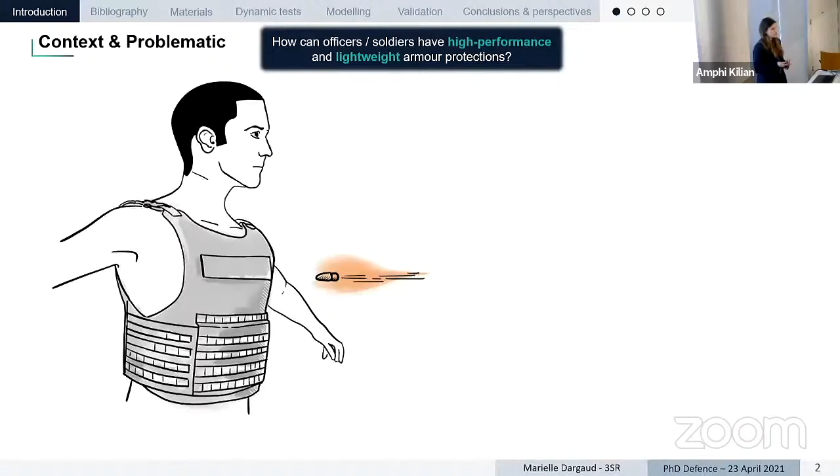So first, what is the context? This is a current challenge: we want to improve armor protections for soldiers and officers. To do that, we need high performance armor protection which is also lightweight. To achieve this, we use, for example, a bulletproof vest with a hard plate that absorbs the energy of the bullet.

These plates can be made of metal, but with this type of solution we reach relatively high levels of weight. For example, a complete protection would be more than about 4 kilograms. This is why we are working on other solutions made of ceramic materials to decrease this weight. The ceramic is always used in combination with a backing, but with this type of solution the complete weight is lower than 2 kilograms, at least twice lower than for metallic protection.

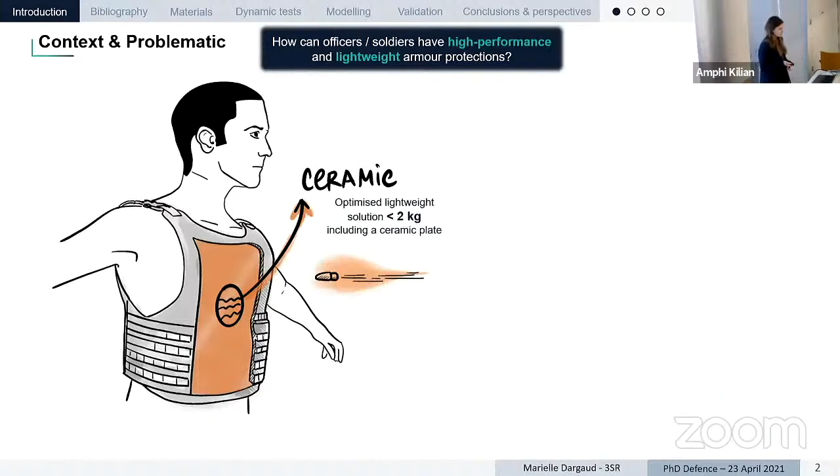Now, you would think of ceramic as something very fragile and brittle. So how can this type of material be very resistant against a bullet? Well, we do have solutions to make this material very efficient in this type of application, because the ceramic plate is very hard and presents good dynamic performance.

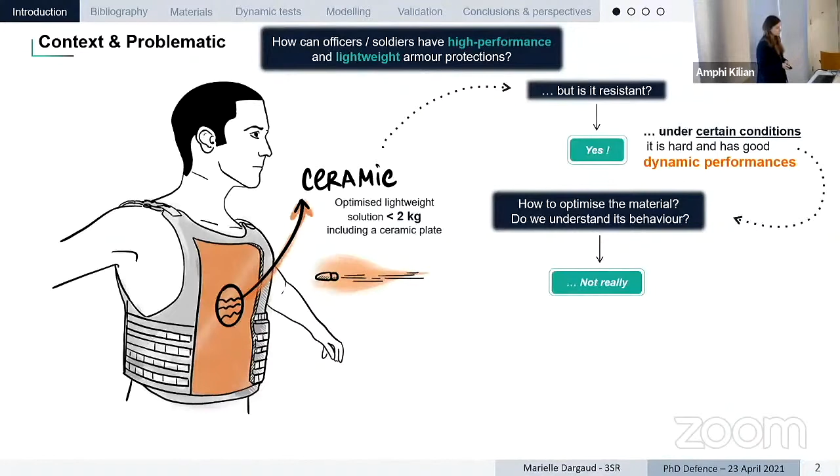Now, if we want to decrease this weight, we need to improve the material according to its application. To do this, we need to understand the failure behavior of this type of material. However, so far this is a big question—we don't really understand the behavior of this type of brittle material.

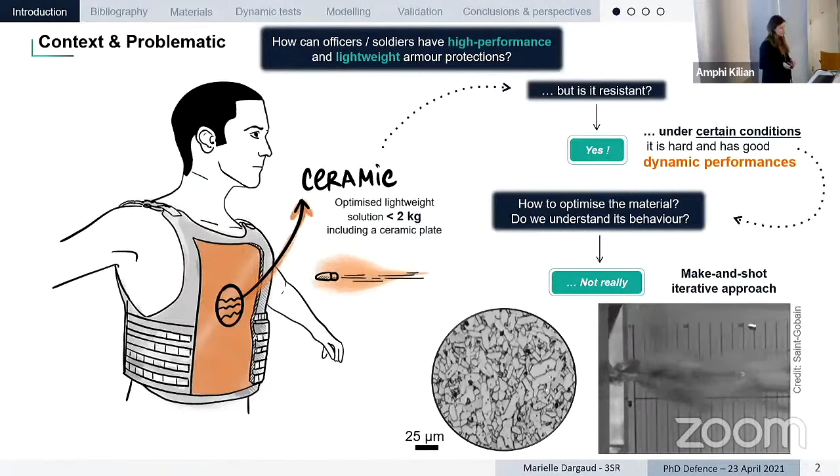For this reason, the main way to optimize this type of material is what we could call a make-and-shoot approach, where we create, with different recipes, a large variety of materials, and then we impact them to see how to improve performance. Here you have a ballistic impact on a ceramic, and you can see the high fragmentation of this ceramic.

So here we need to first develop tools to characterize the material, then modeling to model the failure behavior, in order to ultimately be able to design this type of material.

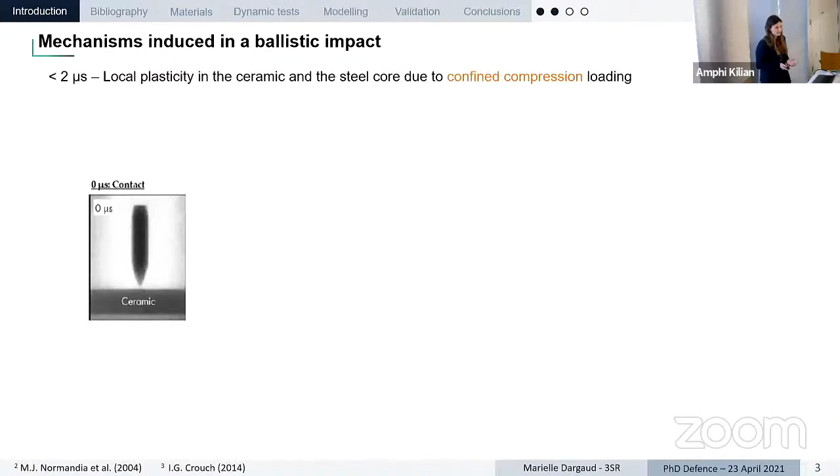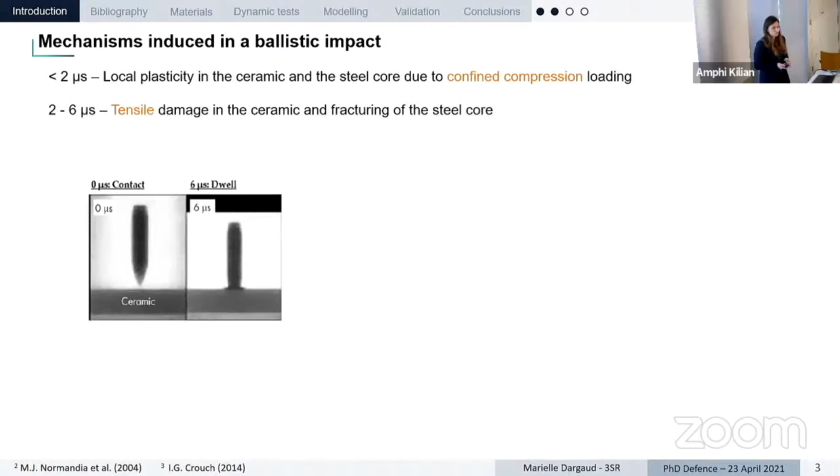During a ballistic impact we have three main stages. The very first stage, up to about 2 microseconds, is when the projectile starts touching the ceramic, creating a very local, highly confined compression which induces local plasticity in the ceramic. Then we have a dwell of the projectile on the surface of the ceramic, during which the ceramic undergoes very intense tensile fragmentation, as does the projectile.

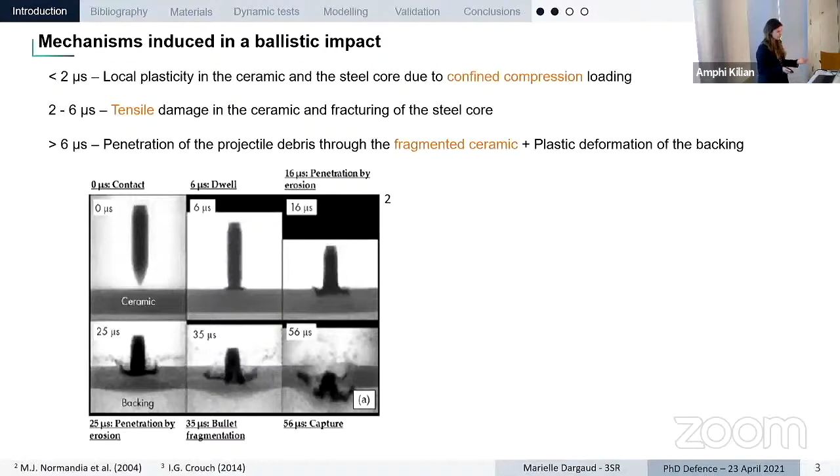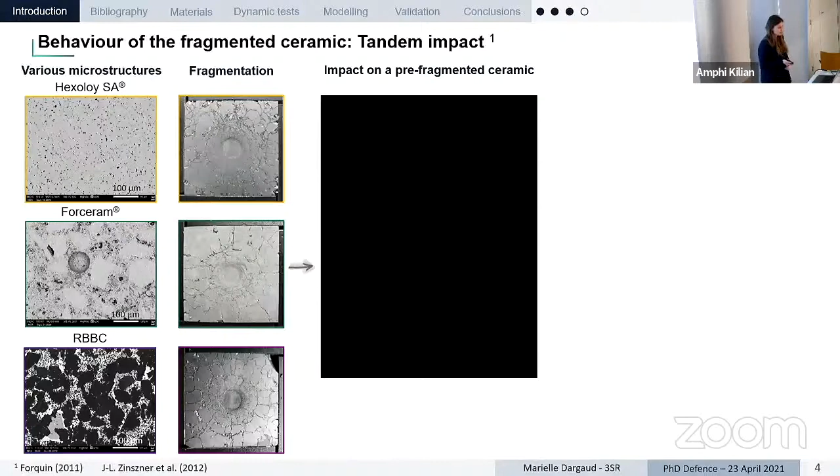Where we generate intense fragmentation in the material, we can see a link between the type of material, its microstructure, and the resulting level of fragmentation. Then we can perform a further impact on this pre-fragmented ceramic with a perforating projectile to evaluate the residual strength of the pre-fragmented medium.

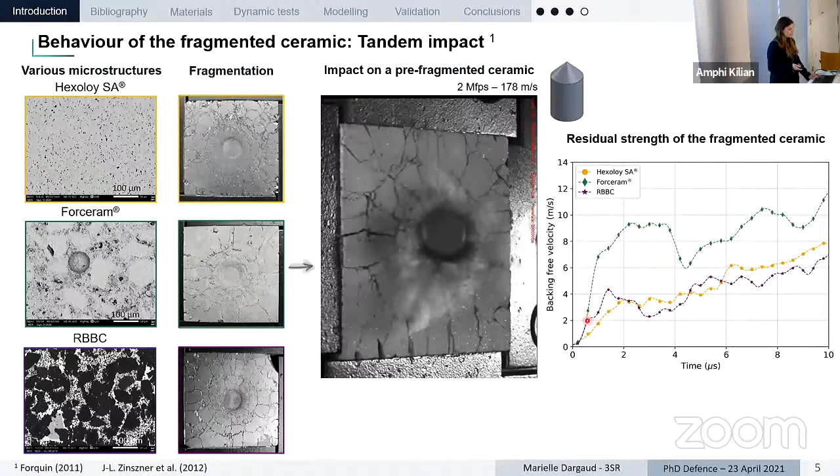By recording the velocity of the backing at the rear face of this system, we can evaluate the residual strength of the pre-fragmented media. Here, for example, you can see very big jumps for the Forceram material, which actually reflects greater resistance to projectile penetration. So we have a link between the microstructural properties, the fragmentation intensity, and the resistance to projectile penetration.

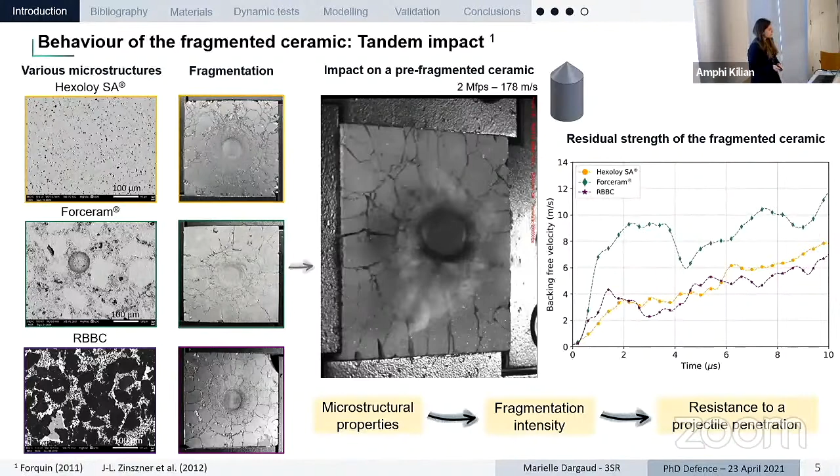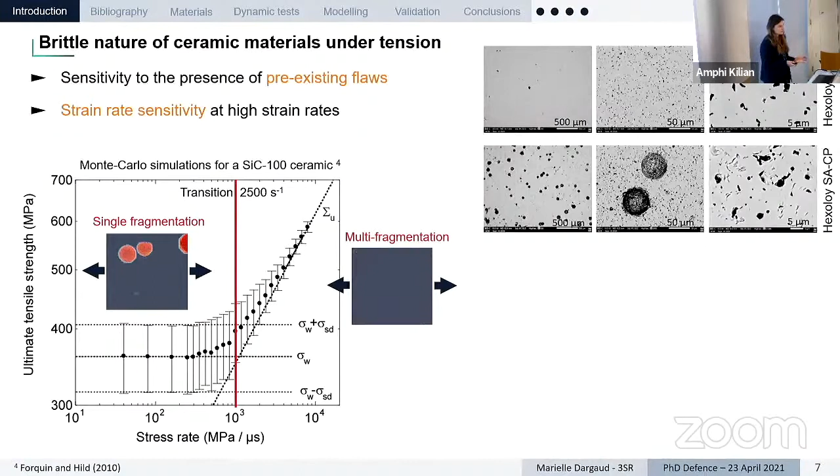And this type of material, because they are brittle, presents a high strain rate sensitivity in their behavior. Here you have Monte Carlo simulations which showed that the expected strength of a ceramic material, silicon carbide, is expected to change according to the stress rate level. At high stress rates, we actually reach an improvement, an increase of this strength. This is due to the fact that according to the loading rate, we induce either a single fragmentation on few defects, or a very intense multiple fragmentation after a certain threshold.

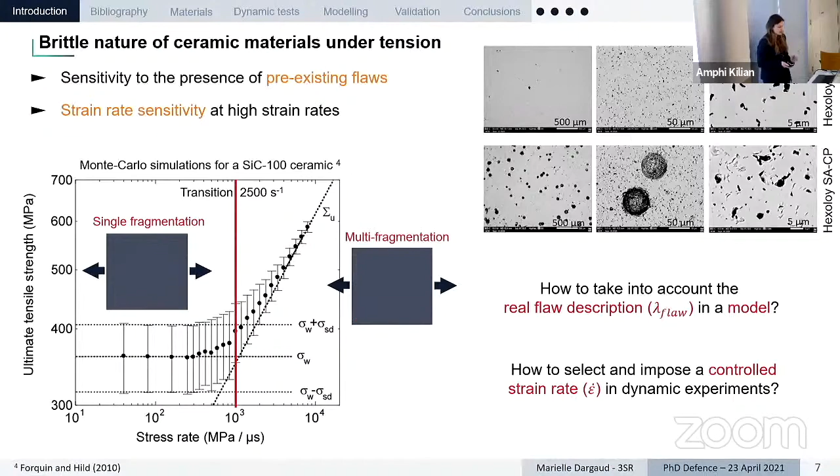So there are two main questions that I'm going to address in this work. The first one is how to take into account the real flaw population in a model, and then how can we select and impose a controlled strain rate in dynamic experiments?

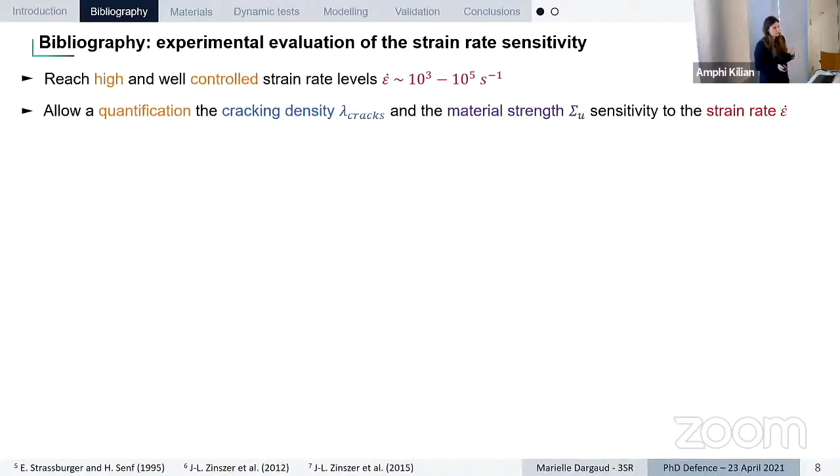When we look at the literature, we have some experimental setups to characterize the tensile behavior of the ceramic, because here we are going to focus only on the tensile behavior, which causes the fragmentation of the ceramic. So the goal is, with this experimental setup, to reach high strain rate with a controlled strain rate, and to be able to reach some quantifications such as the cracking density and the material strength.

The first type of experiments are Brazilian tests or Hopkinson pressure bars, but they are very limited in terms of the level of strain rates that we can reach.

To reach a higher level of strain rate, we can use the plate impact configuration, which allows us to reach very high strain rates. And with a spalling configuration, we can generate a tensile loading. However, in this configuration, we don't manage to reach a controlled strain rate in the material in the failure area.

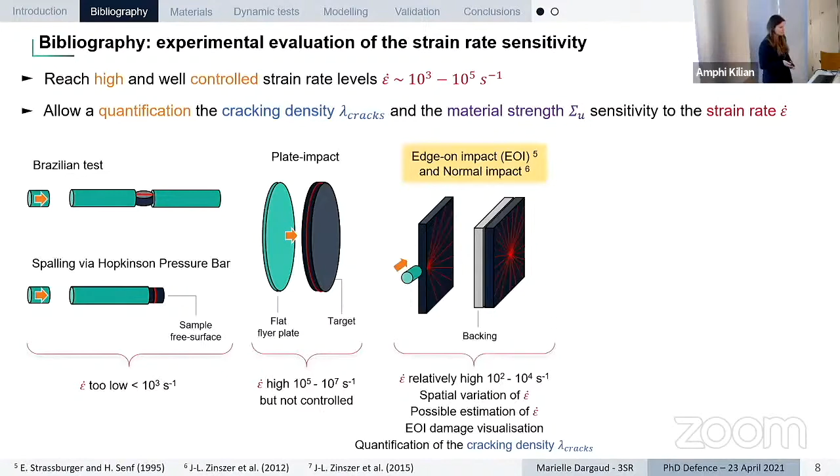The next type of tests are fragmentation tests, which can be edge-on impact tests and normal impact tests. These are two configurations that exist in the literature and provide a relatively high strain rate, which can be estimated. If we look at the type of fragmentation we would get from these two tests, we have the development of radial cracks from the impact point. This configuration allows us to estimate the cracking density in the material.

Then, in order to also quantify the strength of the material, there is the GEPI technique, which can induce a spall failure in the ceramic at a controlled loading rate in the failure area. This technique is very specific: we induce an impulse current in electrodes, which generates a magnetic force causing the failure in the material. However, this technique presents some main limitations.

It's difficult to set up, it's very expensive. So for this reason, we are going in this PhD to develop a new technique in order to reach a well-controlled strain rate that is homogeneous in the failure area. So these in yellow are the two configurations, the types of configurations that I'm going to present today.

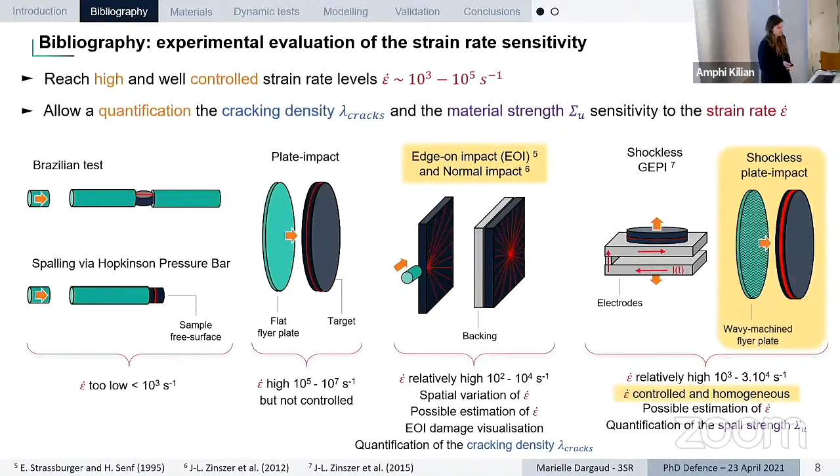When we look at the modeling part now in the literature, well, we have several models, but in our case, for brittle materials, we want to take into account the material microstructure and its sensitivity to the loading rates.

So the most commonly used model to model a ballistic impact is the Johnson-Holmquist model, which is a plasticity model on which we impose a criteria of hydrostatic pressure. Even though it is very highly used for confined compression and tensile behavior, this model has no sensitivity of the tensile strength to the strain rate, and there is no consideration of the microstructural defects.

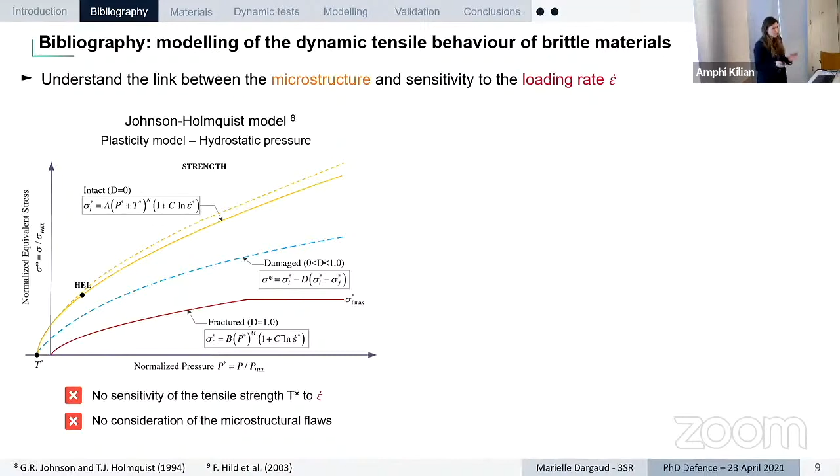For this reason, because we want to implement the microstructural defects, we are going to focus on micromechanical models. One possibility is to use the DFH model, coming from Denoual-Forquin-Hild, which is a micromechanical model that can be used to model the tensile damage behavior in ceramic materials, in brittle materials.

Here in this material, we take into account a random distribution of flaws. When we apply a tensile loading, we increase the stress in the material, and when it's overcoming the failure stress of one defect, some cracks trigger from these defects. These cracks induce a local release of stress, represented by this obscuration zone, and any other pore or defect in this obscuration volume cannot be triggered anymore because of this drop of stress locally.

A very good point of this model is that it can predict the sensitivity of the tensile behavior according to the loading rate. The output of the model can be compared to some experimental data. Most of all, there is an implementation of an explicit density of the critical flaw population in the material. However, this last point might present some limitations that we will explore later in this presentation.

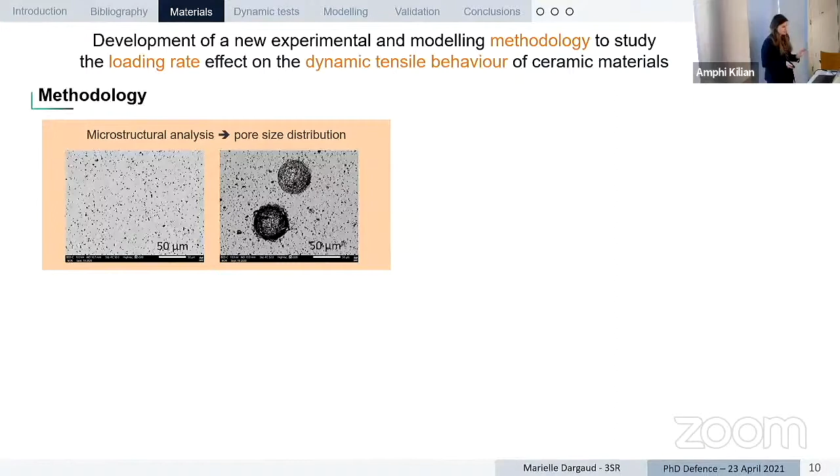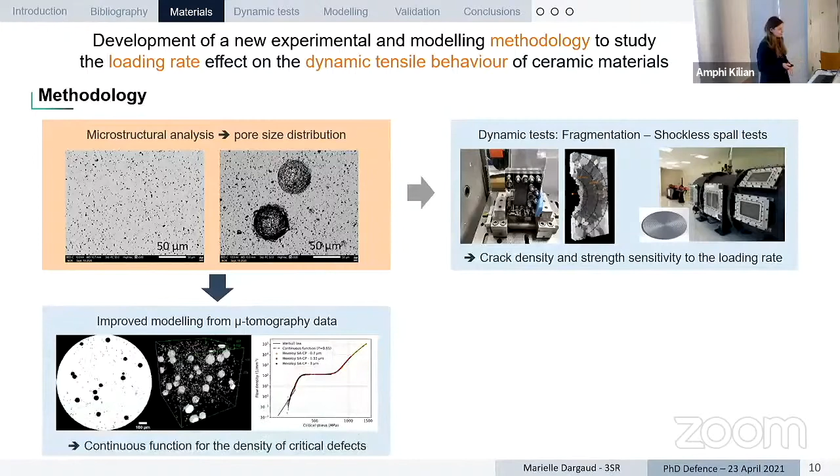So here you have the methodology to develop a new experimental and modeling methodology to study the loading rate effects on the tensile dynamic behavior of ceramic material. First, we start from several materials that we characterize, then perform dynamic tests on these materials. In parallel, we develop a methodology for modeling based on X-ray tomography analysis. By combining all of this, the idea is to see if we manage to improve the predictions of the DFH model compared to the experimental results.

So first, for the microstructure part: in this work, I'm going to present the results for two materials, which are two dense silicon carbides made from solid-state pressureless sintering. The first one is called Hexoloy SA, a commercial armor product of the company Saint-Gobain. This material presents a low amount of porosity.

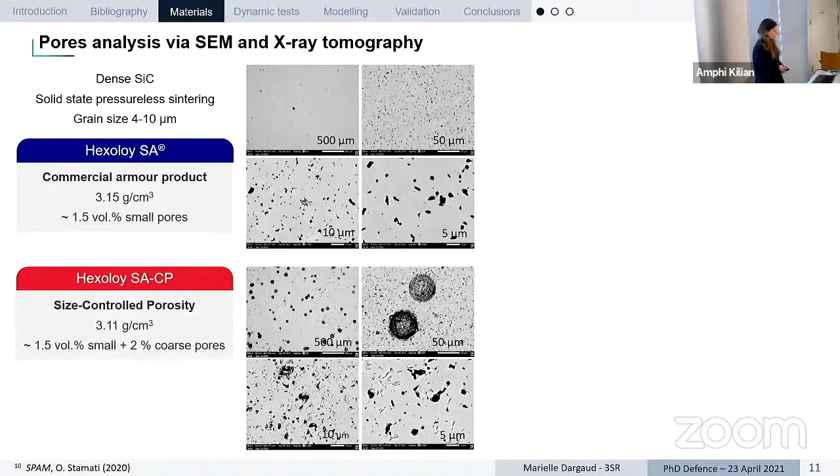Here you have some SEM images at different scales showing this porosity, sintering pores at the boundary of the defects. The second material is a derivation of this material where we have about the same microstructure, but there are some very large and spherical pores in this material. For this reason, we call this material Hexoloy SA-CP, CP for size-controlled porosity. These pores represent about 2% in volume.

Now we've done some tomography analysis on these two materials. Here you have some images of the post-processing of tomography 3D images, where we extract, from a grey level thresholding, only the porosity, which are the main defects present in this type of material. To reach these different defects, we have to reach high spatial resolution for the tomography scan, so we have very small samples to be analyzed from tomography.

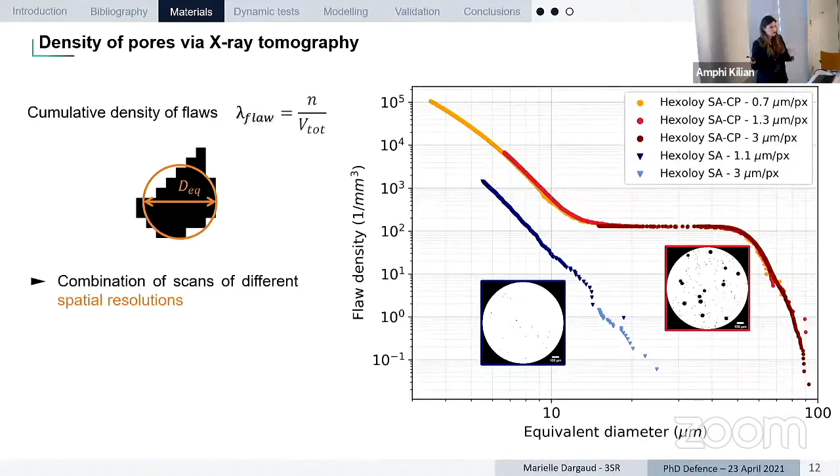Then, from this extraction of pores, we can analyze the distribution of the defects, their size, and obtain this plot, where we have the cumulative density of flaws in the material according to the equivalent diameter of a defect, taken equal to the equivalent diameter of a sphere of the same volume. Here you can see that we've done tests at different resolutions in the scans, so we've done several scans at several different resolutions to be able to capture a large range of the different defects in the material and represent properly the defect population.

What you can say is that first, the material Hexoloy SA seems to have a slightly lower amount of small pores compared to the other one. And the Hexoloy SA-CP presents this very large plateau, which actually reflects the fact that in this material we don't have any pore, almost, in between 15 to 40 micrometers of equivalent diameter.

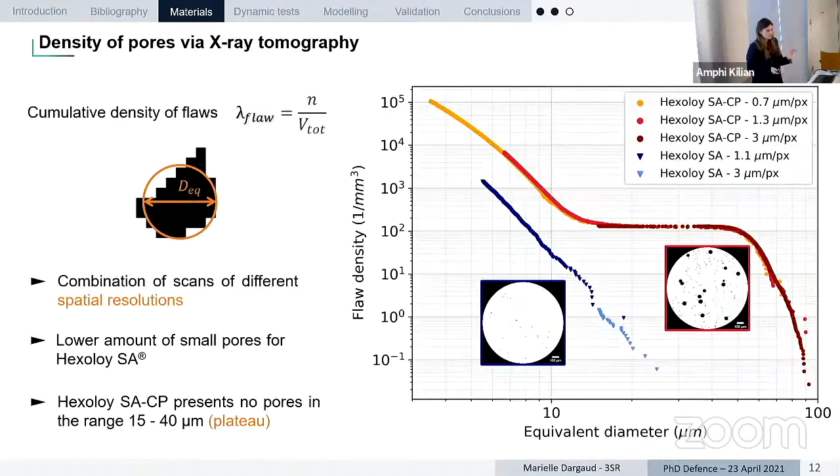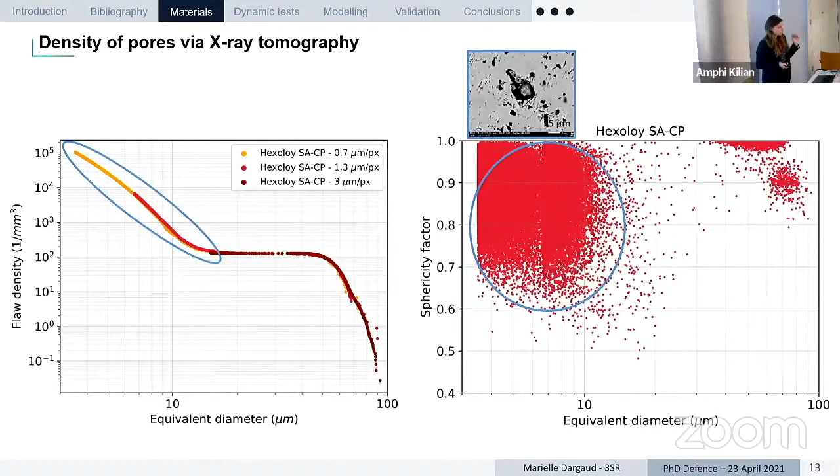So if we focus on this Hexoloy SA-CP, we can see that we have different types of pores. We have the very small ones, which are mainly sintering defects. And when we look at the sphericity factor of these defects, we can see that they're not very spherical, so we have a big cloud here. When we reach a sphericity of 1, it is a perfect sphere.

For larger pores, we can see that we have pores which are extremely spherical and reach a sphericity of about 1. And then we have a last population, which is a bit less spherical, which actually corresponds to these large spherical pores, but which are touching, so they are merging, creating something a bit less spherical.

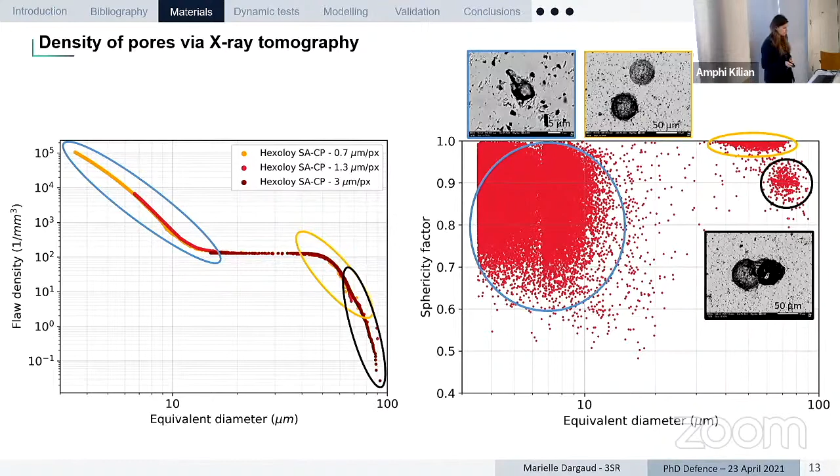Now on these two materials, we've done some dynamic tests.

First, we've performed fragmentation tests, which are the edge-on impact test.

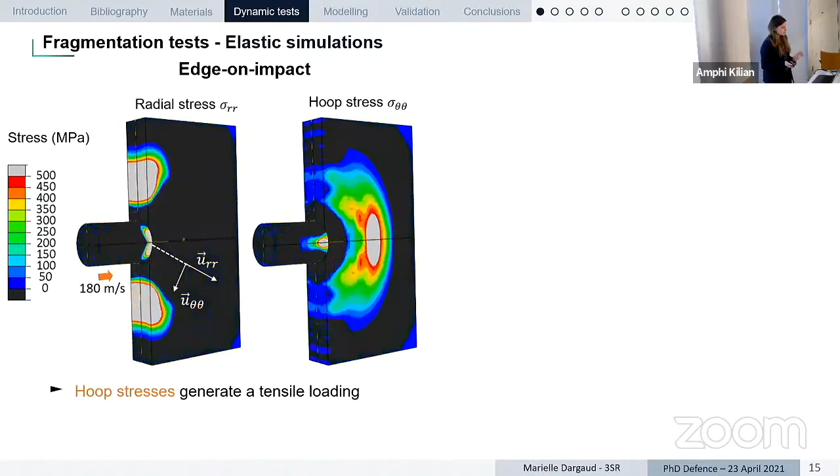Here you have an elastic simulation showing the fields of stress propagating upon impact in the material, in the radial stress and hoop stress. You can see that the impact generates a compressive loading, shown in dark here, which induces a tensile loading in the hoop stress along the loading axis. So here we managed to generate tensile loading in this configuration.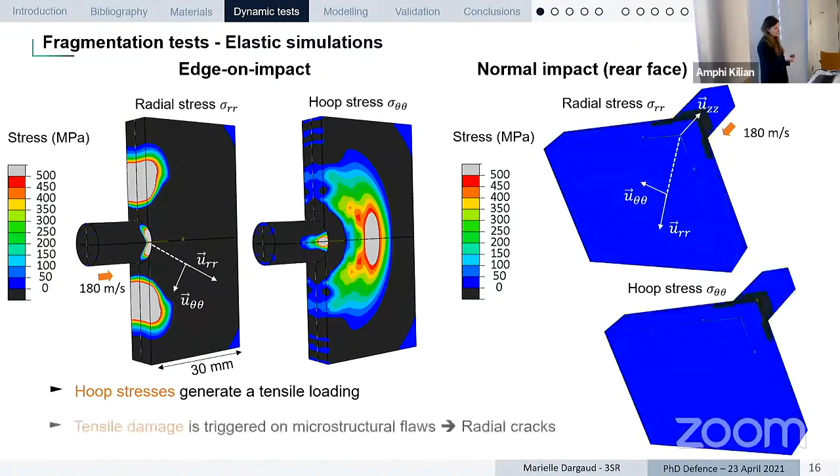The second type of impact that we've done is normal impact. Here you have a quarter of the system, and we are looking at the rear face of the ceramic. We can see that in this configuration, we managed to induce a tensile loading, a tensile failure, at the rear face of the ceramic.

So this is the position where we are going to study the output data. In these two configurations, one idea is to be able to quantify or evaluate at least the strain rate level reached in specific areas.

So first, for the edge-on impact test, we use two points along the loading axis, and at this point we've plotted the hoop stress evolution with time. Here you see the plots, and from the slope of the tensile loading, we can have a numerical evaluation of the stress rate level in this material at these positions.

For the normal impact, we did absolutely the same, but we've taken some points at the rear face of the ceramic at 7, 10, and 13 millimeters from the impact loading direction.

From this, we can evaluate the level of strain rate reached at a given position in the ceramic, and we are in between 10 to the power 2 and 10 to the power 4 per second for the two configurations, and we have an overlap, which is going to be interesting for comparison.

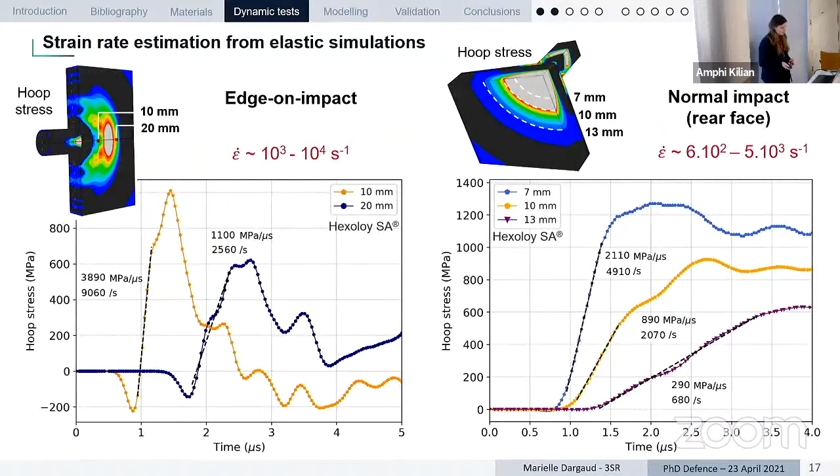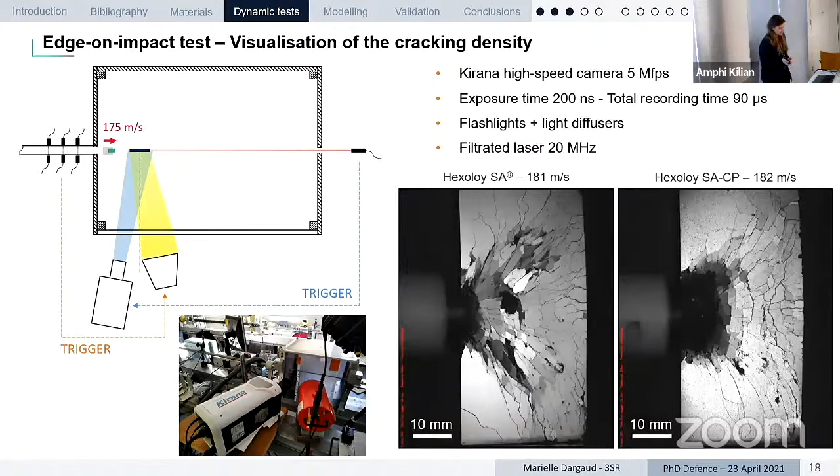Now, the idea is to be able to quantify properly this cracking density. To do this, to be able to quantify it at a specific location in the tile, in the post-mortem sample, we had to keep all the fragments in position upon impact.

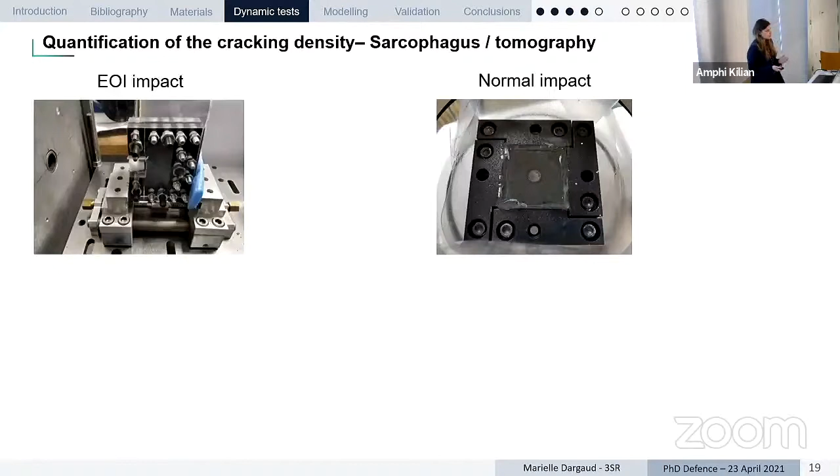For the edge-on impact test, we used a sarcophagus configuration with a transparent polycarbonate sarcophagus. For the normal impact, we used a metallic sarcophagus, but after the impact we infiltrated the fragments to keep them all in one single piece.

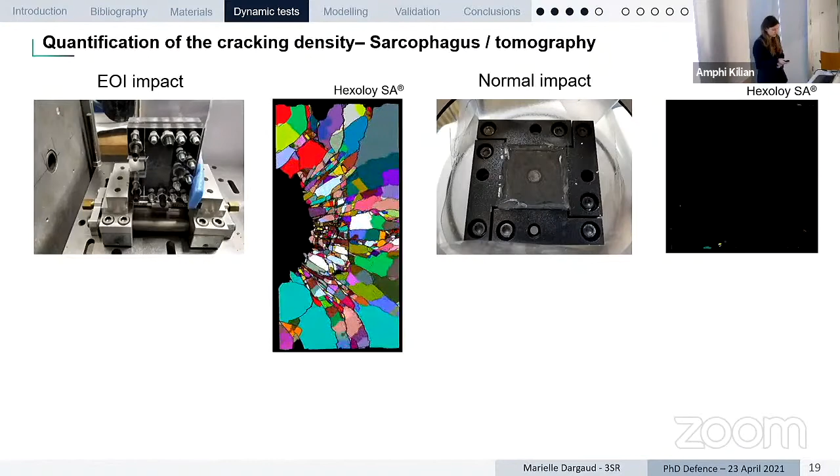Then, for the quantification of the crack density, we took the exact same position where we had the estimation of the strain rate from numerical simulations, and we counted the number of cracks obtained experimentally close to these positions. For the normal impact, we are just looking at the rear face of the ceramic where we generate this tensile loading. This way, we can have different positions where we have an estimation of the strain rate, and a quantification of the cracking density.

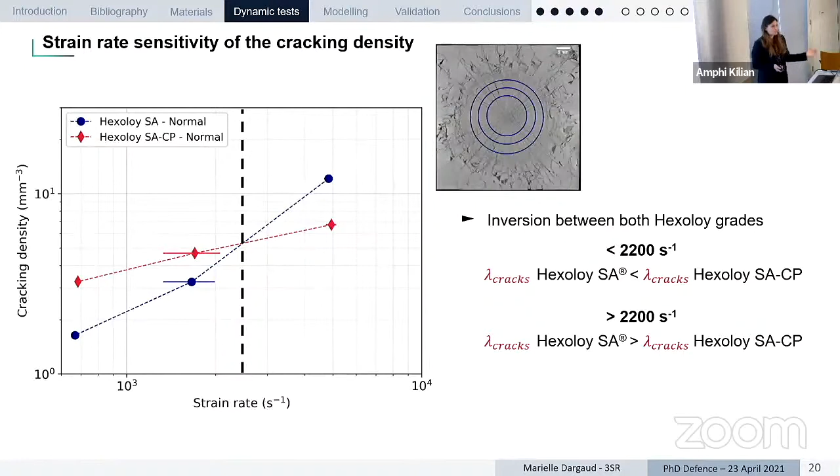We have an inversion of the behavior of the intensity of fragmentation for both materials. So the Hexoloy SA material presented a lower fragmentation intensity at low strain rate, but once we go above this threshold, it presents a higher level of cracking.

If we add some few points for the Hexoloy SA in the edge-on impact configuration, we can see that the results are pretty close between the normal impact and the edge-on impact results.

So here we have a quantification of the cracking density sensitivity to the loading rate.

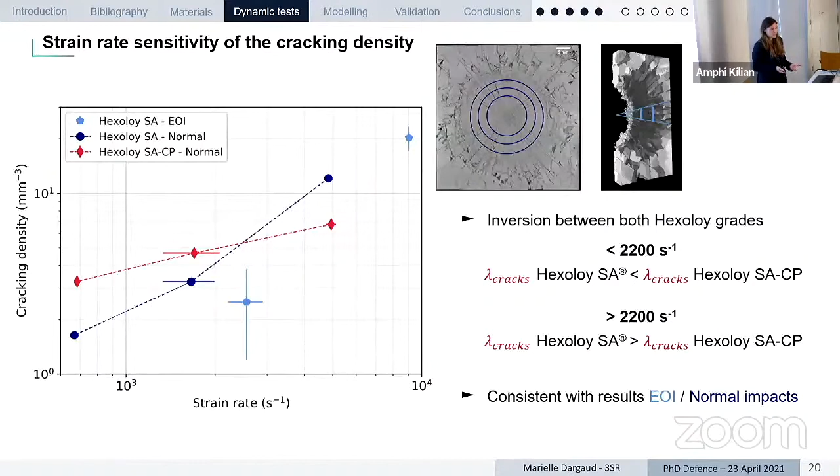Now we want to also be able to quantify the strength of the material under tensile loading. To do this, we need to have an experimental configuration which can generate a controlled tensile loading in the ceramic.

In the classical configuration, there is one main limitation: this flat contact is going to generate a compressive wave which has a rectangular shape, because we have a jump of stress upon impact due to this flat contact.

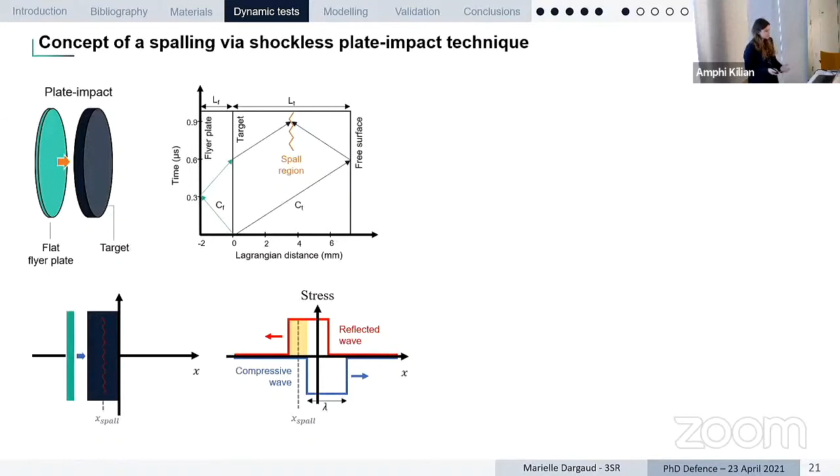The idea here is to be able to control the loading rate during this test. To do this, we need to avoid this rectangular shape for the compressive pulse.

So to avoid this stress jump during the overlap of the incident wave and release wave, we can actually shape the compressive wave into a triangular pulse.

And by this way, when the triangle pulse is going to be sent and then reflected, the overlap is going to generate a homogeneous loading rate in the failure zone of the material. We can see that we have this plateau of the superposition of the two waves, which is leading to a constant level of strain rate.

So now, how do we get this triangular pulse? To do this, we did some numerical simulations where we decided to pattern the front face of the flyer plate, giving it some wavy shapes.

These wavy shapes aim at changing the shape of this compressive wave. So here you have numerical simulations where in the end, we used a 2D model to be able to design the front face of the flyer plate.

We've tried different geometries. So here you have four of them, playing on the height of the pattern, and it's a cosine shape, and we are playing on the height and the period.

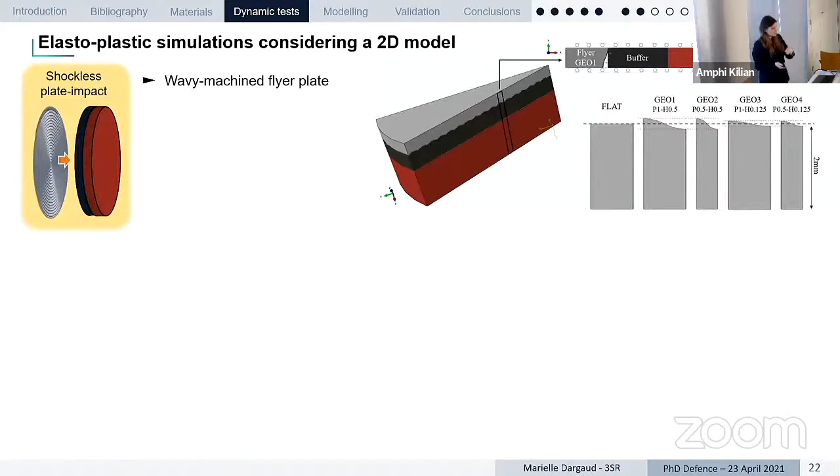And we also play on the impact velocity, which also has an impact on the shape of this triangular pulse. We've selected the best configuration where we could have a pretty good triangular pulse from the numerical simulations.

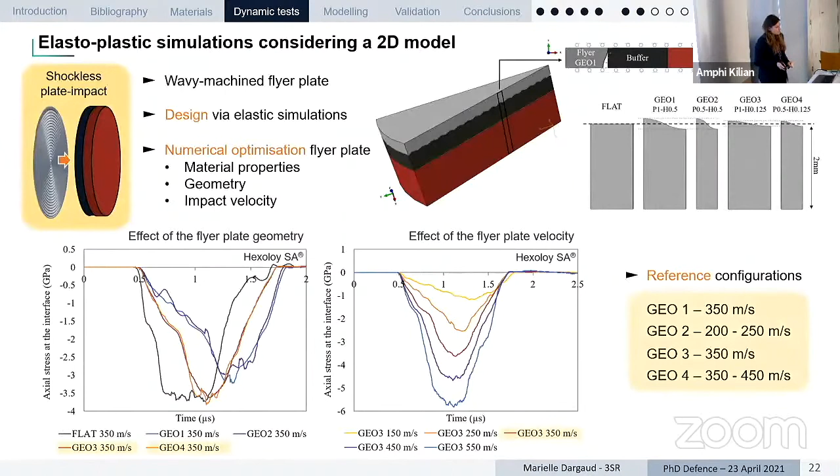So here you have the several reference configurations that we are using for the experimental test. We have 4 different flyer plate geometries at different velocities. So now we've designed this flyer plate to reach a triangular pulse.

Now let's see the experiments. So the experiments are done with the gas gun at 3SR laboratory.

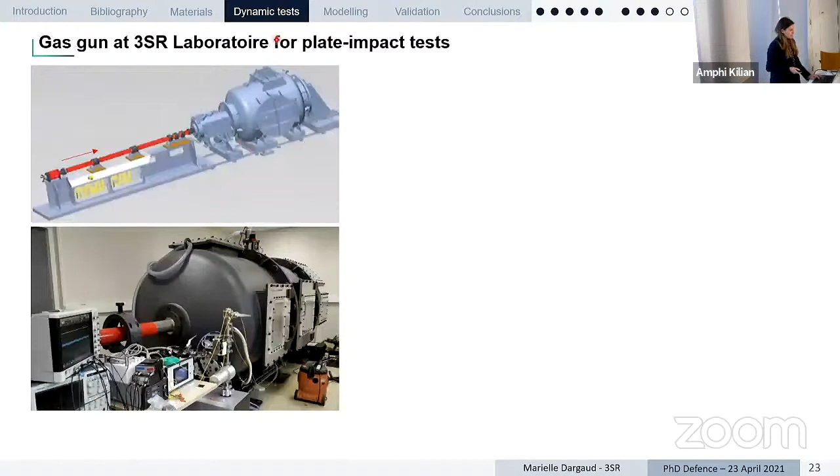So we perform plate impact using this launcher, where we actually put the projectile in here, and it is going to be launched in this long tube, and it is going to impact the ceramic target in this big chamber, which is put under vacuum.

So here you have images of the projectile put into a sabot and the target, on which we actually have put a buffer plate, which is just a mechanical filter, which is going to transfer a more homogeneous loading to the ceramic.

Then we had to make sure that during the test, we don't have any tilt between the flyer plate and the ceramic. So we had to work on some alignment systems. We had to make sure that we control the impact velocity during the test. And in the end, we want to capture some data from this experiment.

So to do this, we use interferometry systems where we actually put two optical fibers at the rear face of the ceramic to capture some data. We'll see that later.

So we had a lot of setup to work on to be able to do this test. I would say it took about 6 months to design the projectile and be able to understand how to make the test and get something out of it. A test itself is about 1-2 days.

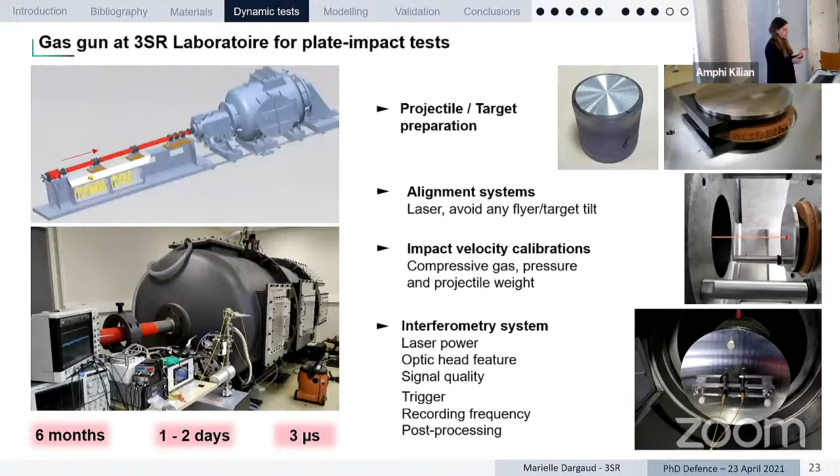And in the end, the result is just, well, 3 microseconds. So you can imagine the different scales of time. But we need to capture everything from these 3 microseconds. So this is why putting all the triggers and things like this is very important.

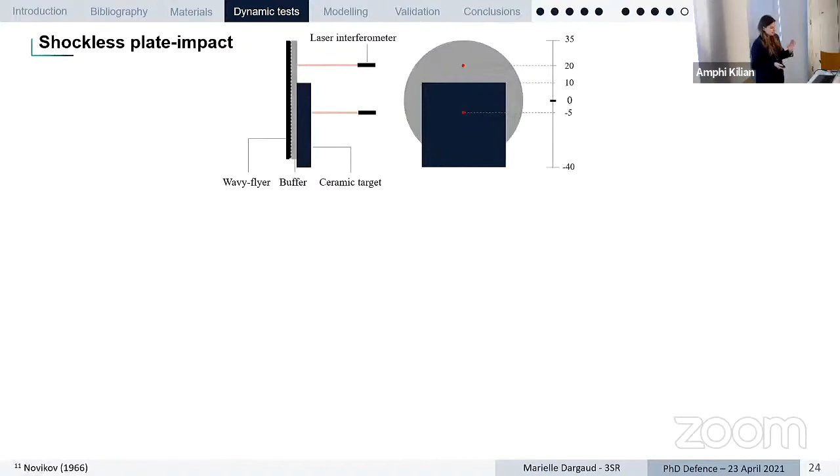So here you have a scheme of the setup where you have the flyer plate, the buffer, and the ceramic. We've decided to translate slightly the ceramic according to the loading direction to be able to actually use a first laser interferometer at the backing, at the rear face of the buffer plate.

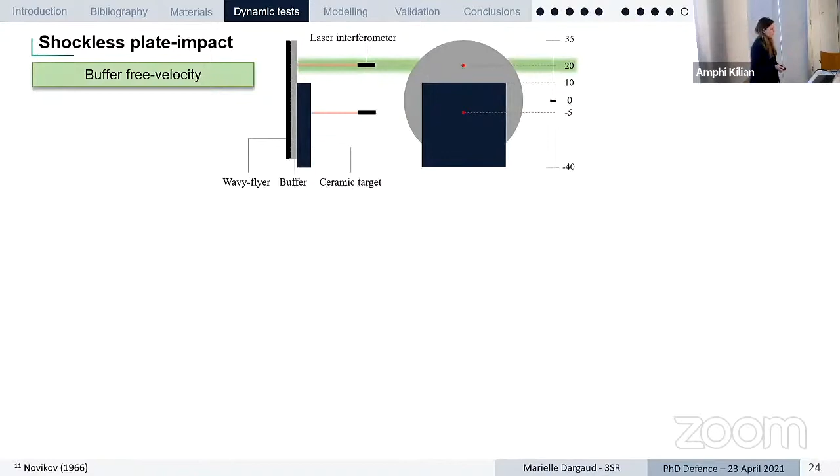We can also, by playing on the different shapes and configurations, change the shape of this transferred stress. Then we've used this experimental pulse as an input for numerical simulations to evaluate what was the strain rate generated upon impact in the failure zone.

To do this, we've done numerical simulations, elastoplastic simulations, and this allowed us to evaluate the strain rate. In parallel, during the test, we use a second laser interferometer, which is capturing the free velocity at the rear face of the ceramic.

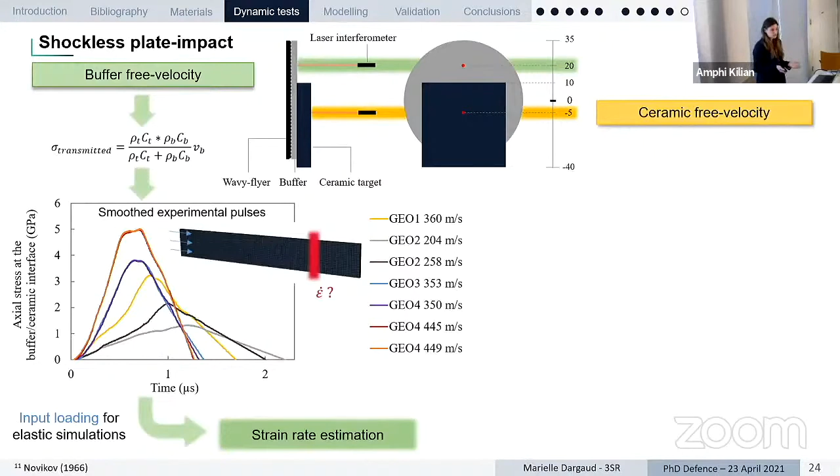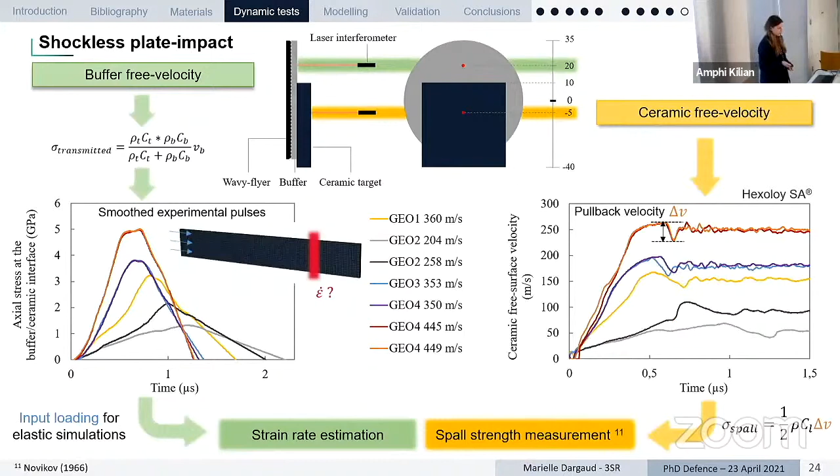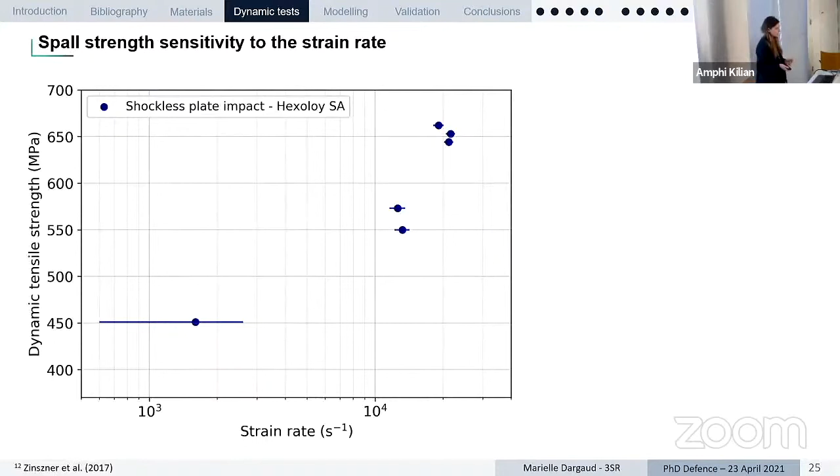From all these results, we can get to this plot where each point is just one single experiment. So here you have for the material Hexoloy SA, the evolution of the dynamic strength according to the strain rate. You can see that we have a sensitivity to the strain rate. We can also see that for 2 tests in the exact same configuration, we get the same results.

So good reproducibility. We've compared these results to experimental results obtained from the GEPI technique that are present in the literature on the exact same material. And we can see here that we have a good fit. We have something which is coherent between the 2 techniques.

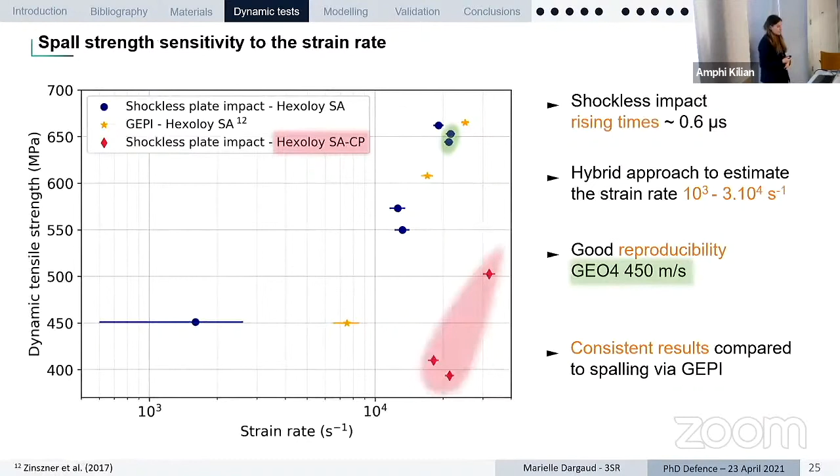And we've done some additional tests on the Hexoloy SA-CP, and we can see here that the dynamic strength, tensile strength, is slightly lower than the first material, but still we have this sensitivity to the strain rate.

So now that we have experimental data, in parallel, we're working on a modeling effort to be able to predict the behavior of the material. The current DFH model is actually using statistical data to describe the critical density of defects.

Currently, what is used is the Weibull model, which says that we have a probability of failure in the material, which is related to the flaw population that you have right here. And this flaw population in this Weibull model is expressed according to the principal stress, sigma, and the Weibull modulus, m.

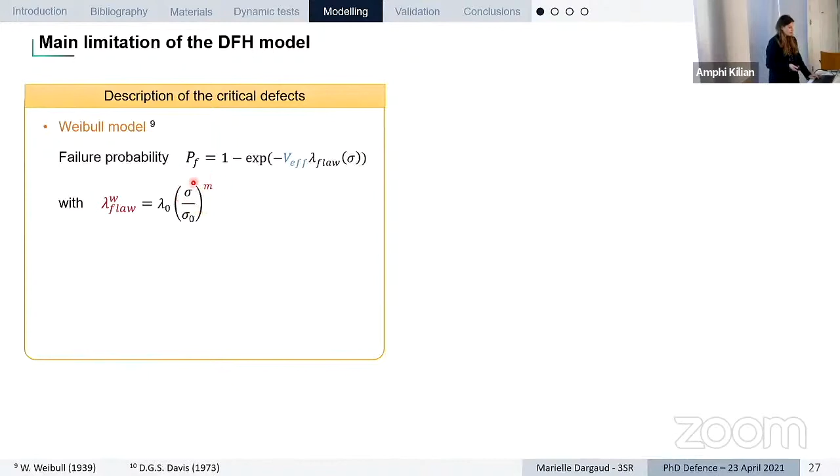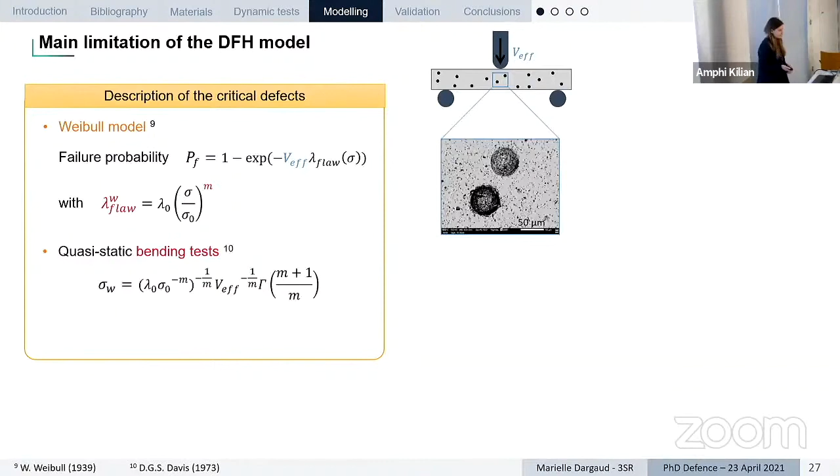In order to get and reach this m parameter, we need to do a quasi-static bending test. So here we can evaluate this parameter m from the scattering of the results obtained from bending test. What we can see is that the parameters that we are going to obtain from this bending test highly depend

on the effective volume that was loaded during the test and the most critical defect that is in this loaded volume. However, if we zoom in, for example, this material, we can see that we have other defects, which are here porosity, but are way smaller.

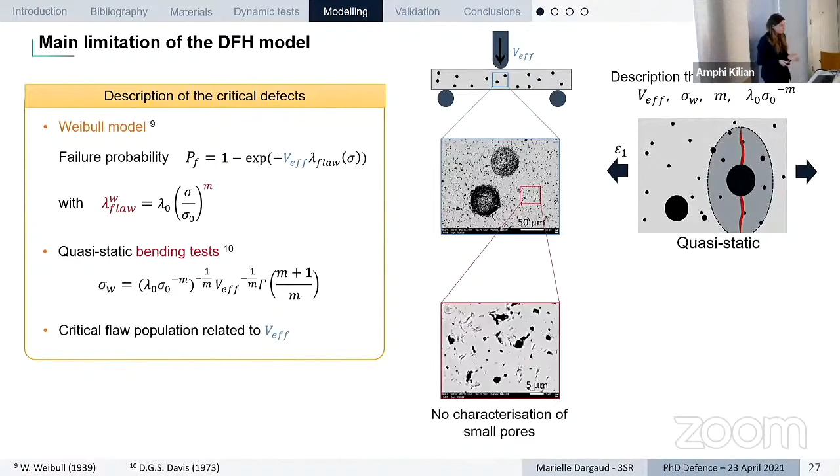And these defects are not going to be triggered during a quasi-static bending test. So the big question is, do we actually need to characterize these defects and implement them in the model to have a good characterization of the behavior of the material?

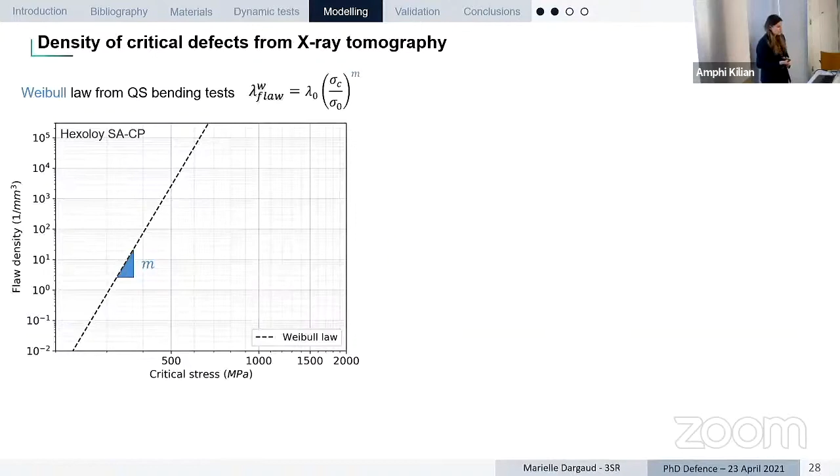In order to reach a complete description of the flaw population, what we did is that we used X-ray tomography. So here you have the classical approach with the Weibull law obtained from quasi-static bending test, and the Weibull modulus is the slope. The question is, how can we use the tomography data to have this plot of the cumulative flaw density according to the critical stress?

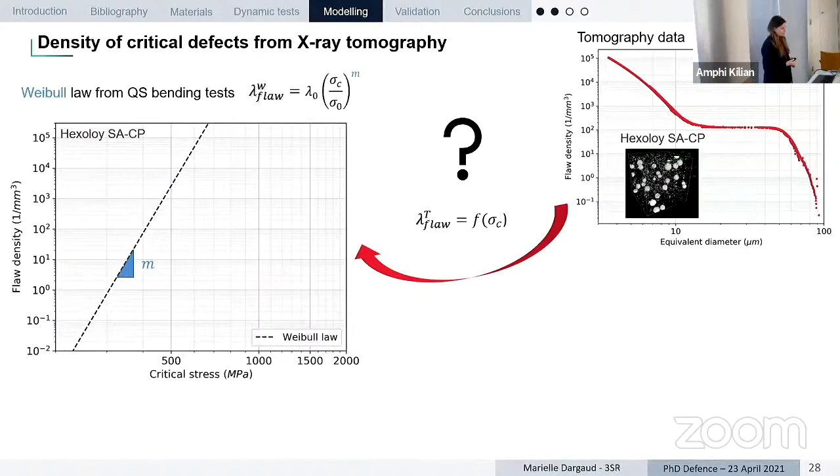To do this, we can use linear elastic fracture mechanics, where we express the critical stress of activation of a defect according to its size.

Here we have this Y parameter, which translates the shape of the crack. This parameter needs to be calibrated.

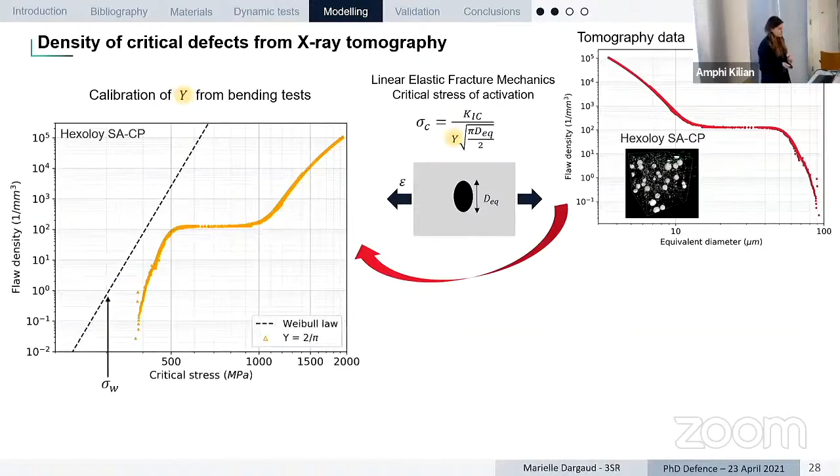To do this, we actually plot the conversion of the plot, but for different values of Y, and the best value is the one fitting the data from bending test at the level of the average bending strength.

One hypothesis that we make here is that we have a constant parameter Y for all the defect populations. So here we have a parameter of about 0.85. And from this curve, we can now fit a continuous function that we can get explicitly and that we

will use and implement in the model. So we did the same for the material Hexoloy SA.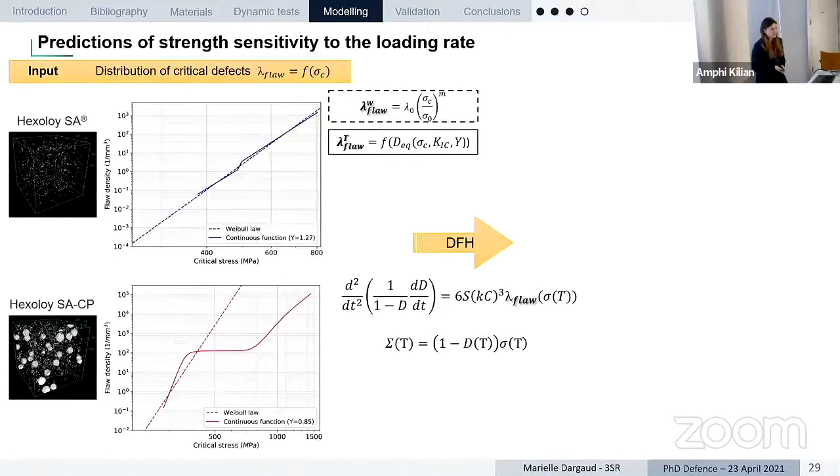So when we are going to apply the DFH model and the analytical formula to get the strength, we have almost the same results. However, for the second material, the large difference in the critical population of defects is going to lead to a big difference in the strength sensitivity to the loading rate.

And you can see here that at high strain rates, we actually have a very high increase of the strength of the material, which is not captured in the Weibull approach.

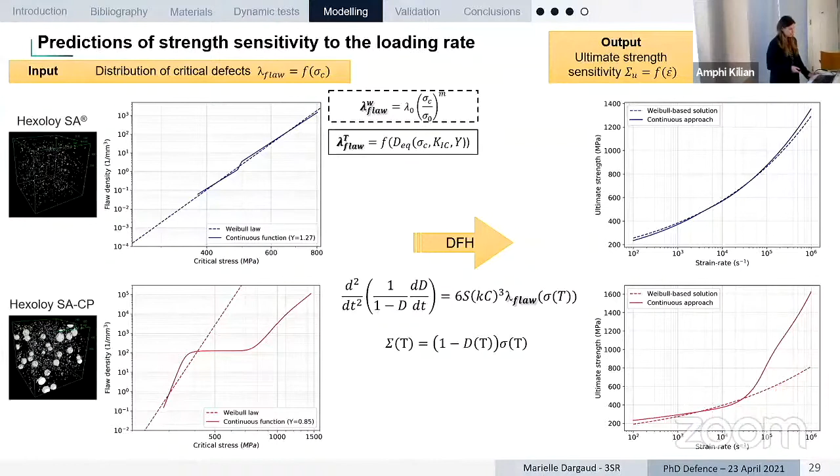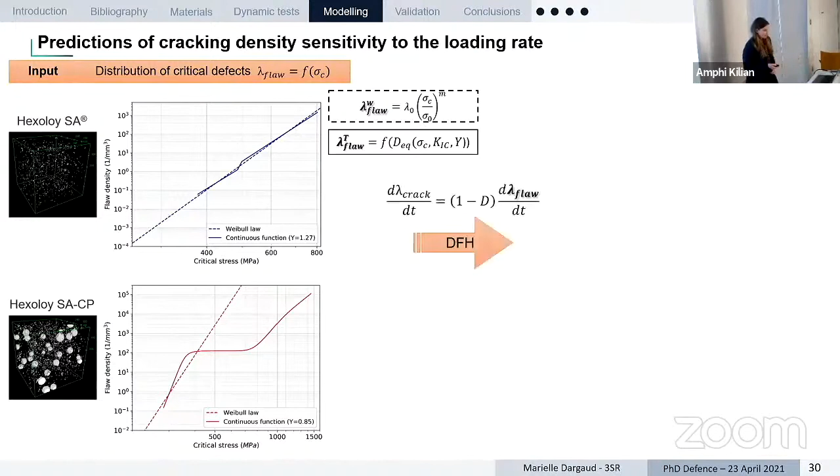Now, if we do the same to have the predictions of the DFH model, but for the cracking density, well, we apply this analytical formula with the evolution of the cracks in the material, and we can get the evolution of the cracking density according to the strain rate.

What we can see for the Hexoloy SA, it's pretty much the same due to the same input data. And for the Hexoloy SA-CP, we can see that we have a plateau which leads to a lower cracking density than what would be expected from the Weibull approach.

In order to understand better this phenomenon, we've developed another approach based on X-ray tomography, but which is a discrete approach in which we capture the defects during the tomography scan at the exact same position and with their size.

And from this, we create a numerical volume on which we are going to do tensile loading at a given strain rate. And at a given strain rate, we can actually identify which were the pores which were triggered in the configuration. So here you have a histogram where for a given strain rate, you have the population of defects that was triggered.

So at low strain rate, what happens is that we only trigger the largest pores. When we increase the strain rate, we reach this plateau in the input function.

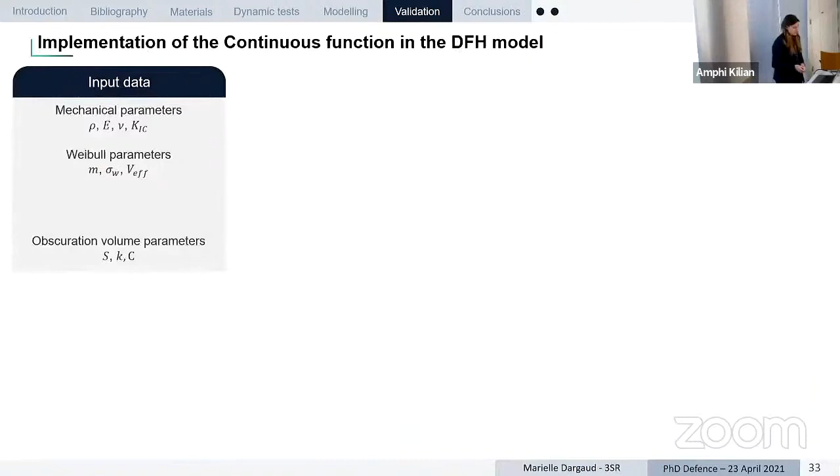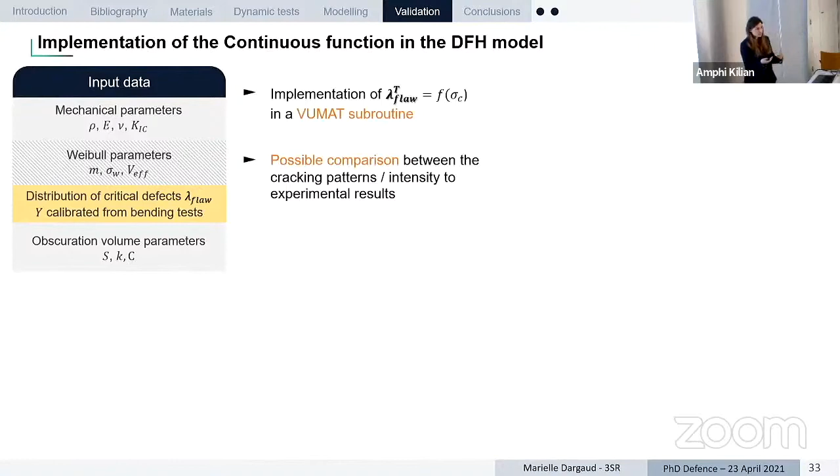So now from this data, we've done some comparison between the experimental test and the modeling. In the DFH model, before in the simulation, here were the input data. Now we've changed that. We've deleted the Weibull parameters and used our continuous function that we can explicitly implement in the model, so we can run numerical simulations with this DFH model using a realistic distribution of flaws in the material. From this, we can have a mapping of the cracking density, which can be compared to the cracking density obtained experimentally, for example here for a normal impact.

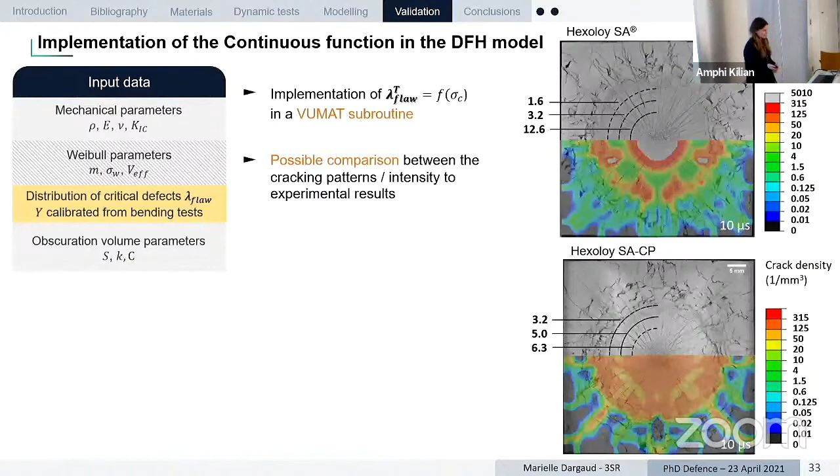When we compare the modeling and the experimental results, we can see that we are in a pretty good range compared to the modeling. However, we can see that at high strain rate, we tend to numerically overestimate slightly the level of cracks. One hypothesis is that at this high rate level, close to the impact point, the density of cracks is very intense, so with the spatial resolution of the tomography, we are limited in capturing these cracks.

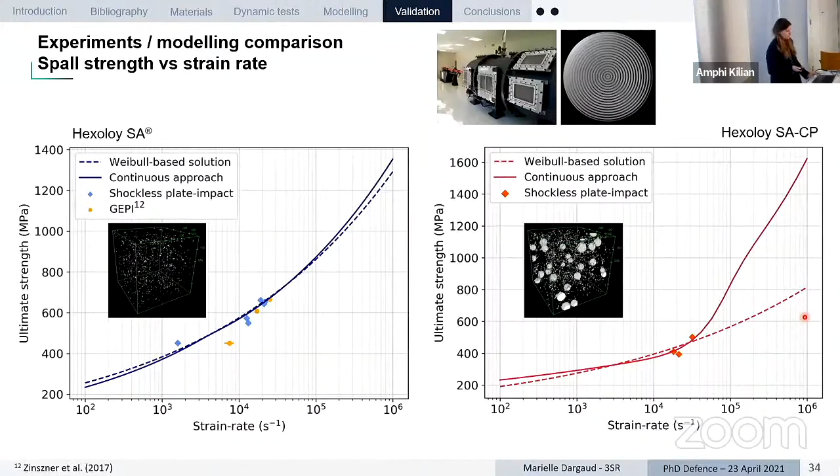Now, when we compare the results of the shockless plate impact with the prediction, we can see that for both materials, we have an extremely good prediction with the DFH model. We have a good fit with the experimental data, and still here we know that we would need to perform more experiments at higher strain rate to demonstrate experimentally that using flaw distribution based on tomography data, capturing the smallest flaws, would be required to have a proper description of the material.

When we compare the two materials, we can see that in the end, the very high increase of strain rate sensitivity above a certain threshold for the Hexoloy SA-CP leads, in the end, to reaching a higher level of strength compared to the other material, which did not have these large spherical pores.

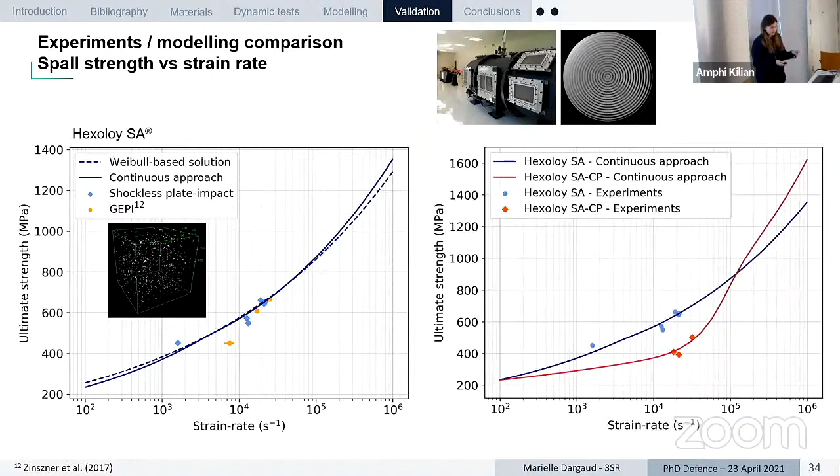So in the end, here are the main conclusions of my PhD. We needed to have a new methodology in order to first study the strain rate sensitivity of the tensile behavior, and then evaluate the role of the flaw population.

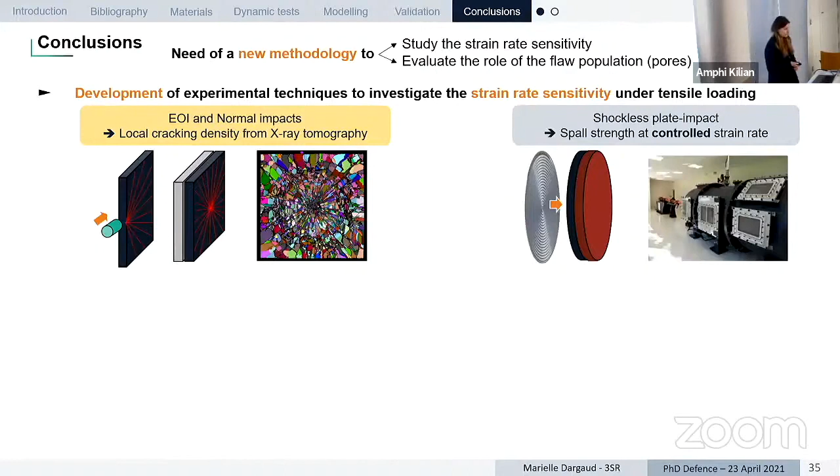To do this, we've developed new experimental techniques combining fragmentation tests and tomography post-processing. And we also developed a very original technique based on shockless plate impact.

We've improved the modeling using X-ray tomography to properly characterize the full distribution of the defects. We've developed a continuous and discrete approach to understand better what is the role of the defects, and we were able to implement this continuous description into numerical codes to predict the fragmentation of the material.

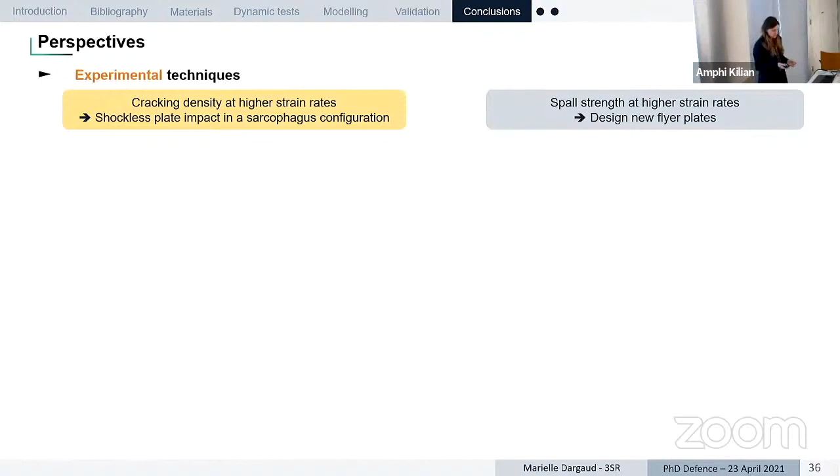There are main perspectives for this work. First, for the experimental part, we would need to try to reach higher strain rates. To do this, we could use the shockless plate impact, but with samples in a sarcophagus configuration, and design new flyer plates to reach higher levels of strain rate.

For the modeling part, now that we've seen that we can have an explicit continuous description of the flaw population, we can now play on the shape of this continuous distribution that we can decide, and see from the DFH model what is the output, and how to improve the strength of the material this way.

We can also extend this approach to other types of material. Here we are on, let's say, an ideal microstructure with pores as our main defect, but we could extend, with some adaptation, this approach to materials presenting a mesostructure, where the size of the grains is going to have an influence, or the different phases is also going to have an impact on the failure behavior.

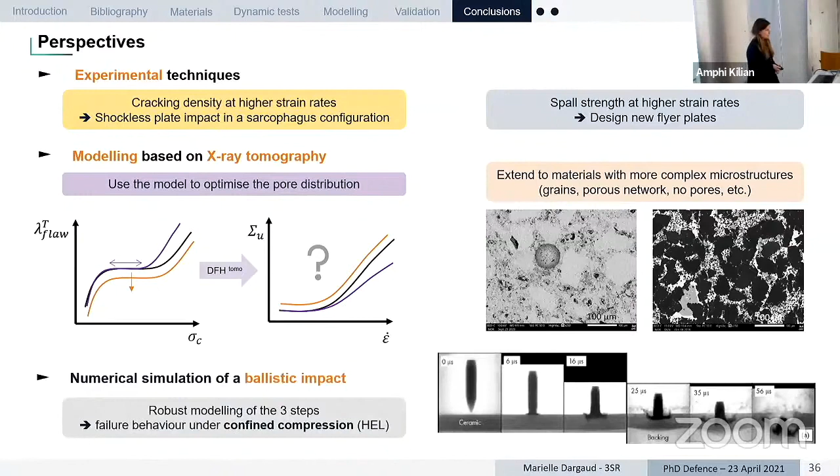In the end, the main goal is to reach a numerical simulation which is realistic compared to ballistic impact. We saw that the ballistic impact is divided into three main steps. We need to extend this work to have a robust modeling of the compressive behavior under confined compression. For the tensile behavior, this is what we did today. And also for the behavior of the fragmented ceramic.

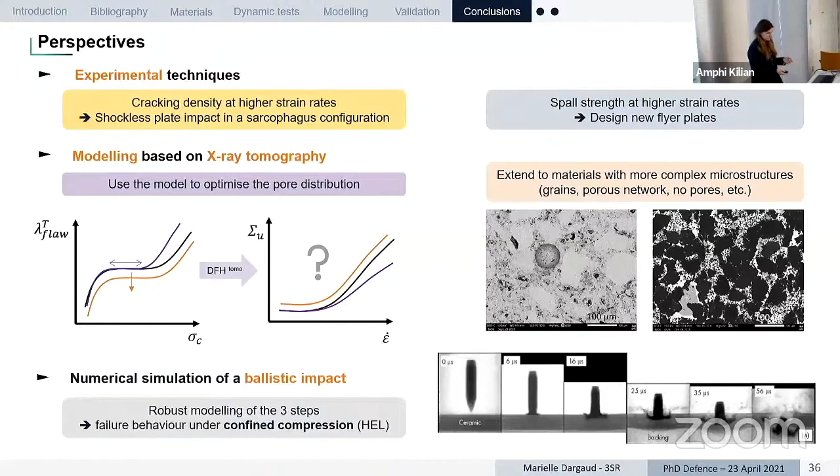So thank you very much for your attention.